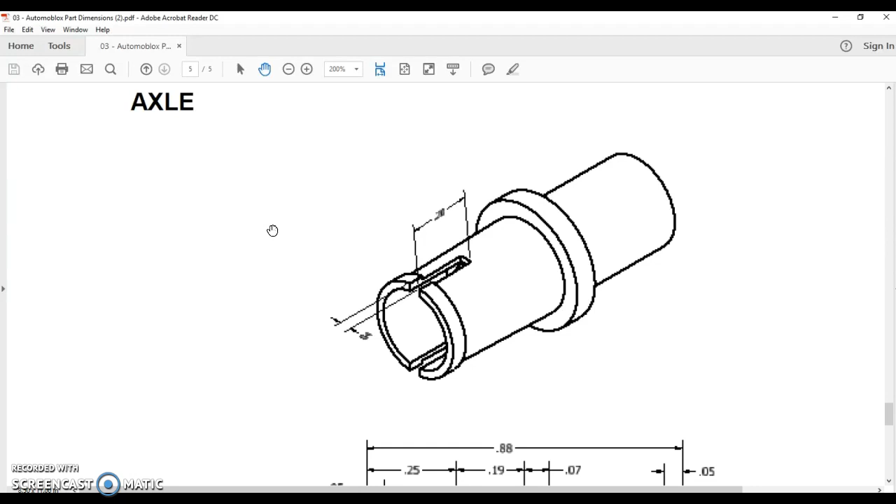Hi everybody, in this video I'm going to be walking you through the process of creating this axle for the Automoblox T9 vehicle. It looks daunting because of the number of dimensions on it, but it's really not that bad, to be perfectly honest.

We are going to draw a center line here to start off. You can see this long, short dashed line - that's our center line. Just like we used the Revolve feature for the rubber sleeve, we're only going to draw the top half of this profile, and then we should be able to revolve it to create the axle shape. If we take it easy and go a few steps at a time, it's a little bit long of a process because of the number of dimensions and constraints you have to add in, but again, it's really not that complicated, not as bad as it looks.

Okay, so let's start off with this. You see how we have the 0.88 going all the way across - that's fully the left side to the right side. What I'm going to do is start off by drawing this center line that's 0.88 long, and I'm going to lock that thing in place. That gives me a nice, good, clean anchor that I can lock to at any point for the rest of the shape.

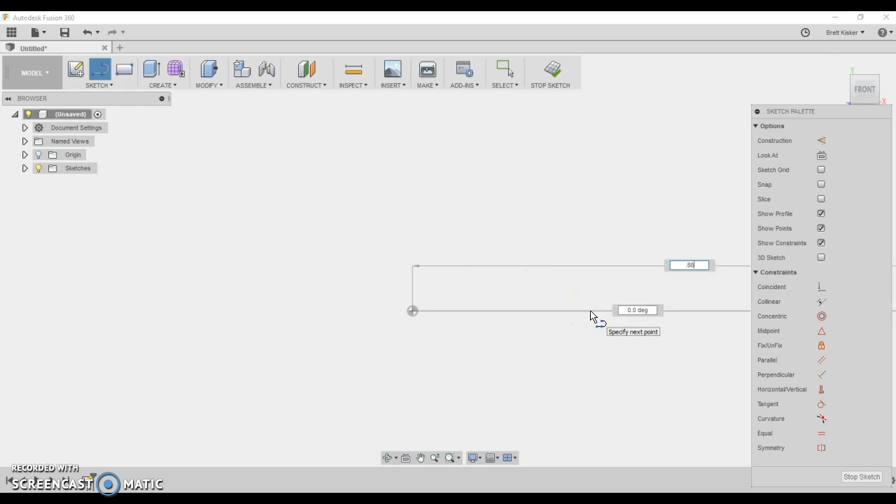So I'm going to come over here, create a new sketch. I'm going to draw on this plane, hit L for line, and place a horizontal line that's 0.88 long. I'll hit enter, and I have that created. Again, what that does is give me a line to reference.

Now, this is not actually part of my shape, so I'm going to click on it and hit X. Okay, and now it's a construction line. I don't have to worry about that being part of my profile later on.

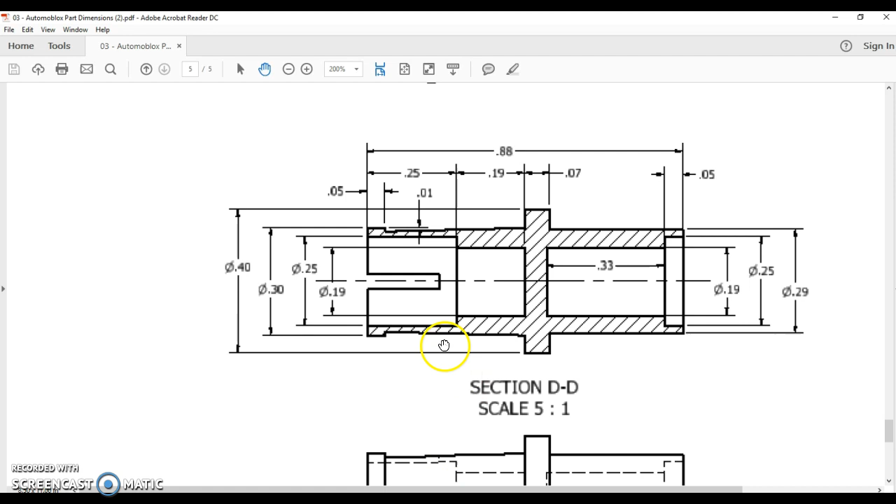Okay, now let's move forward with this. The next thing I would do is come over here and draw a rough outline of the top. So I'll come down, over, down, all the way around this profile just on the top. I'm going to make sure it lines up on the left side with the left end of that construction line, and on the right side with the right end of that construction line. I'm going to pause the video for just a second, and then unpause it once I get the rough outline and shape, and show you a few tips and tricks before we move forward any farther.

All right, so here we go. You can tell I've got my shape here, and it's not even close. I exaggerated some of this stuff on purpose because I want to show you some tips for making this a little bit easier on yourself. Okay, so first of all, a commonly made mistake - this line does not actually line up with this one. They are not collinear. A lot of students will draw it that way. Those are not the same thickness, the top and bottom portion of this, so be careful about that.

If you did go through and do that, and you move one and the other moves with it, you need to go through and delete the little constraint symbol next to it that says collinear - it'll look like this. However, on the left side, we do want to make sure that this line... we need to undo that. Okay, let's try this again. Collinear constraint - this line and its counterpart above it, those should be collinear. You can see that little symbol appears now, and when one moves, the other moves.

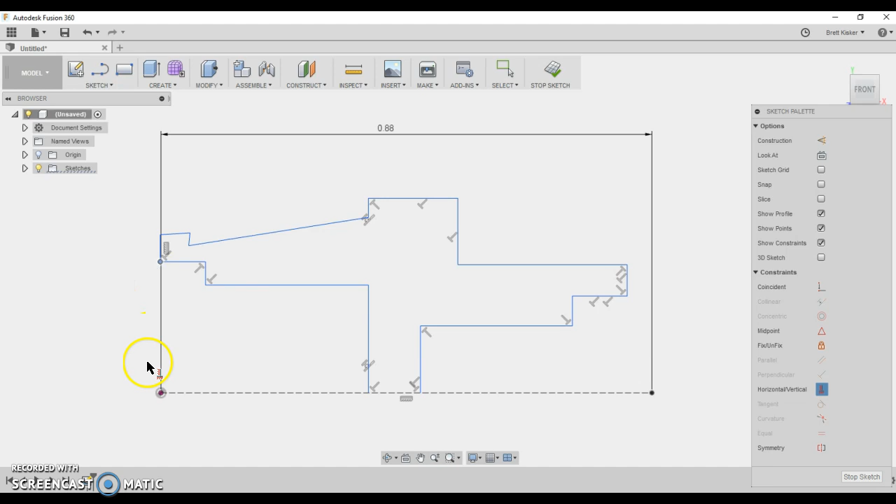Okay, that's very important. I also need to make sure I'm going to come over here and make sure I'm not clicked on a line first. I'm going to click horizontal vertical constraint, and make sure that this point lines up with the left edge, and this lines up with the right edge of the construction line, so that my actual profile is the correct width all the way across.

Now, before I get rid of that horizontal vertical constraint, I want to make sure that this little section here is actually horizontal. I notice a lot of times people will not actually draw it that way - you've got to be careful. Same thing goes for this one, this should be a vertical line, so I'm going to go ahead and click on that.

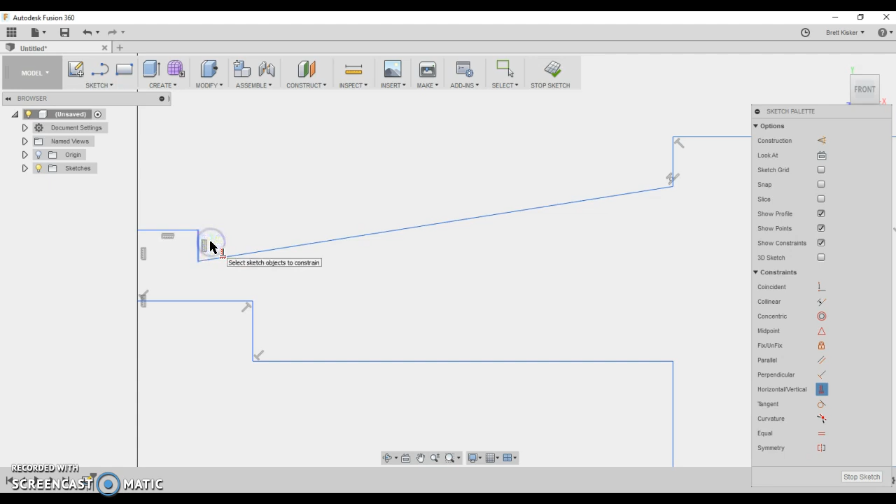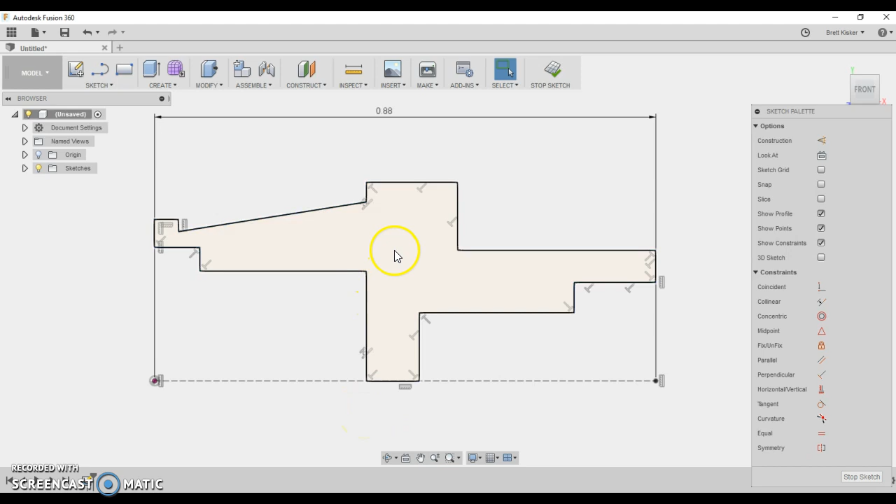Okay, so we're getting pretty close. Now it's time to go through and add dimensions. By the way, along the bottom here, there is actually a line - in fact, let me redraw it just in case. There should be a line. Aha, you see how that just filled in? If that's not filled in, you won't be able to revolve it, so make sure you draw the line that goes all the way across from here to here. Okay, so apparently I'd missed that, and you'll notice that if this is filled in with the pink shape, the profile is actually closed.

Now let's talk about the dimensions we have for this. Do not get overwhelmed by the number of dimensions here. Start off with just the widths: 0.05, 0.25, 0.19, and so on. You shouldn't have to add the 0.88 again, you shouldn't have to do any math. You should only add the dimensions that are here. So I'm going to do 0.05, 25, 19, 07, 33, 05.

I'm going to pause the video, and when I get done with that, I will unpause it and we can move forward. You do the same. Okay, so we have all of these left to right dimensions, these width dimensions, all the way across. So let's go to the next step.

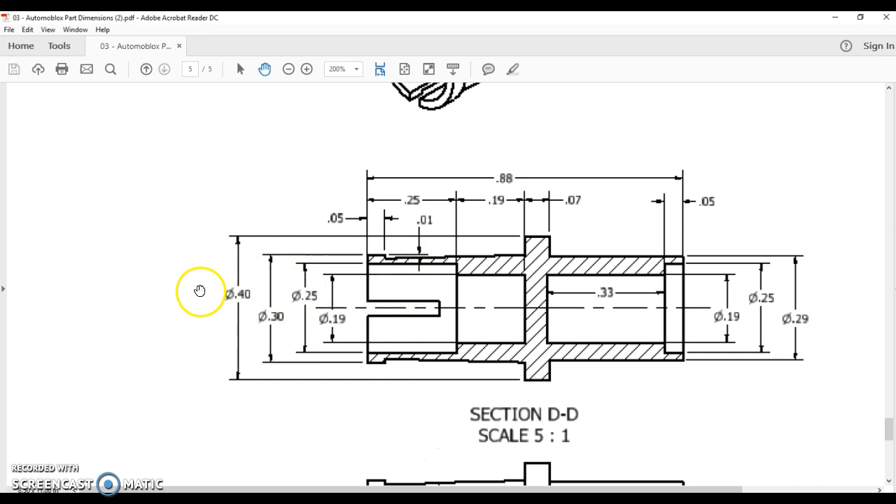Let's go through and actually use the heights, but we're going to use all these diameters, because it's a circular opening in the middle, it's actually a hole. It's a circle. Notice that they've used diameter: 0.19, 25, 30, 40. Now, a lot of students will try to convert this into a radius, or just type it in as such.

You got to be careful here. We need to know this, notice the 0.19 goes from this height all the way down to this height. So just like we did with the rubber sleeve, we're going to dimension it as a diameter of 0.19.

The way we do that is to come over here, dimension, I'm going to click between here and the center line. But instead of coming over here and typing in 0.19, I'm going to right click and say that's going to be a diameter dimension instead. Now notice it puts it up here, but it's still going to be the same, 0.19.

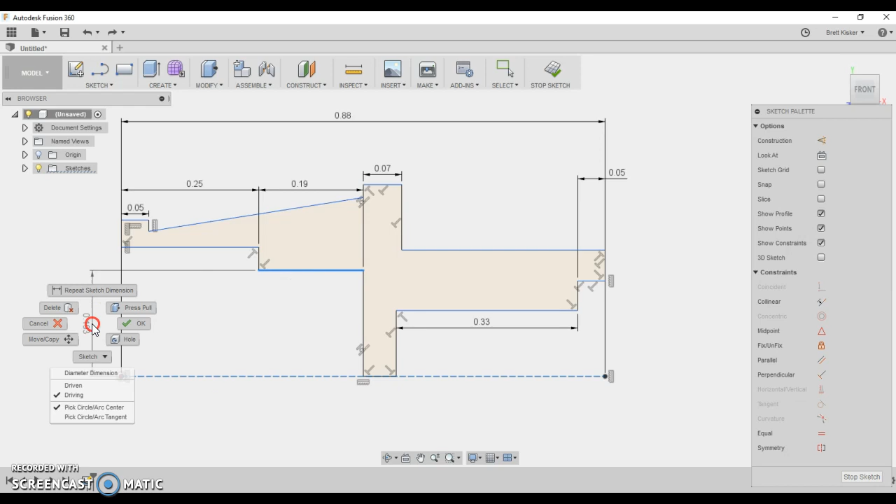And whenever I do that, that's weird, so let's go backwards here. I'm going to undo that for just a second. If I come over here and click on the center line first, now it'll go. So the line that you click first is what you're going to revolve around. You need to click on the construction line first. So that's my bad, it's 0.19.

I'll just drag it out of the way because that's messy. Okay, and I have that one dimensioned. So I'm going to come over here and pause the video, but I'm going to add in the 0.25, 30, 40. I'm also going to add in the 24, 25, and 29 on the right side. So get those in, and when you're ready, unpause the video.

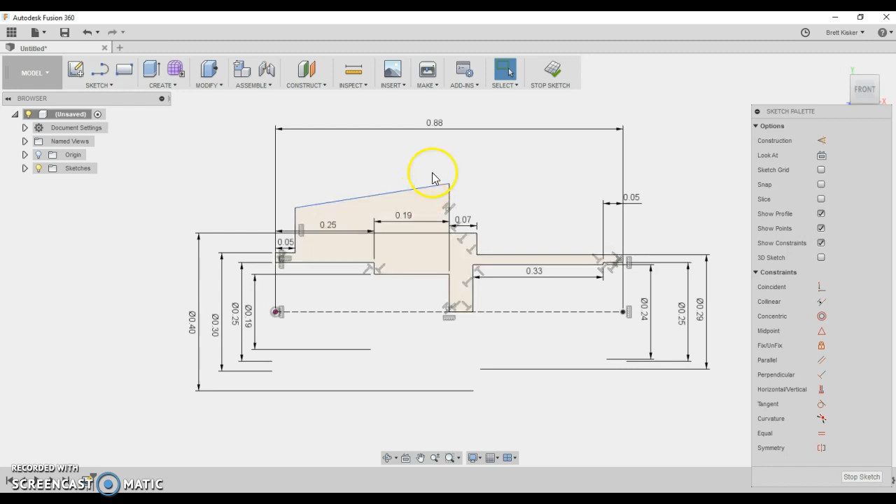Okay, so I've added all of these diameters in, and it looks good, except I got this weird thing happening over here. You'll notice that the lines are starting to fill in black, which is good, because that means they're constrained. The one that's blue, of course, is the one that can still float around, which is this guy. Don't get concerned about that.

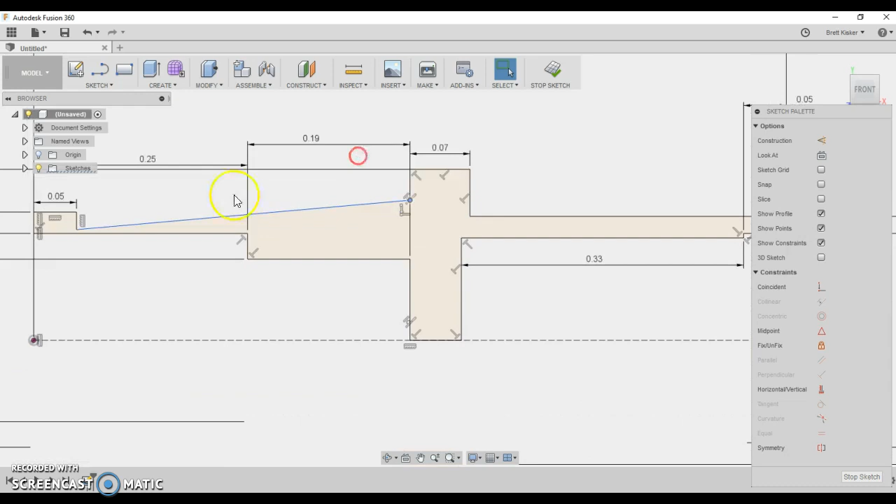All we need to do is drag this back down into place, and we're getting pretty close to where we need to be. You'll notice I'm able to actually move that, I'm able to move this up. The question then, and the one that's always missed, is how do I get this thing into place? So what we have to do is look really carefully at this.

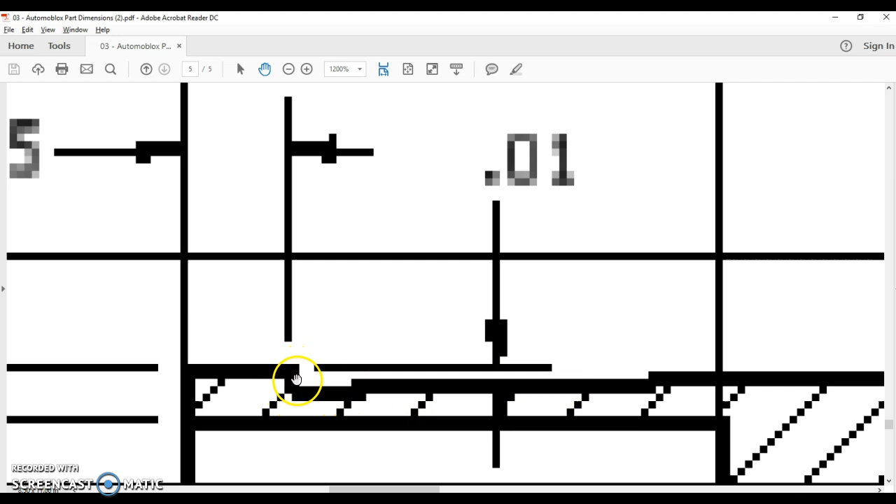You see this 0.01? Let's zoom in on that for a second. See what that's saying, let's see if I can get this back. What that's saying is it's 0.01 inches between the top surface here, that's where that extension line is, and then this arrow, which is kind of hidden by the shape, goes to the bottom line. So that means if we were going to go from this point to this point, that's a drop of 0.01.

So let's go add that in. Dimension, I'm going to zoom in here. This drop is 0.01. Okay, so now I have the bottom placed correctly. The question now is, where's the top?

What is this? And what it doesn't really say, and it's tough to see, is that if I was to zoom back out, this point actually has an extension line that goes all the way to it. This is actually lined up horizontally with this line.

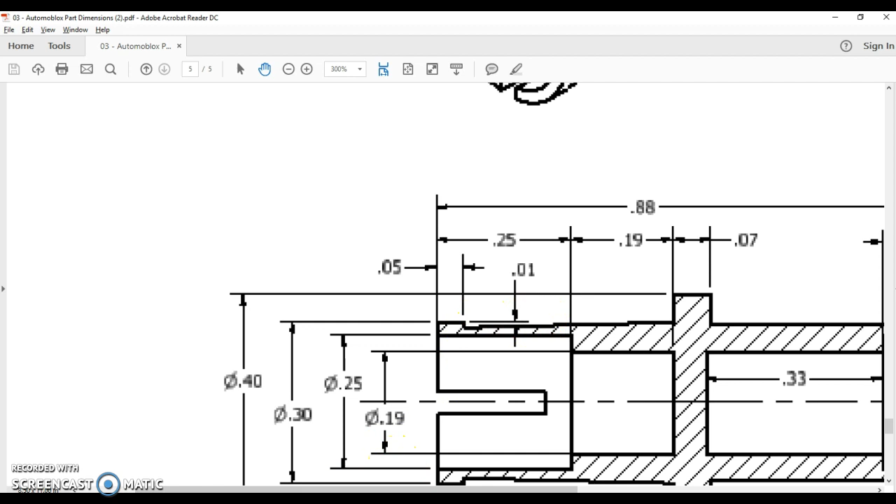So what I can do is come back over here, click on the horizontal vertical constraint, and say that this dot needs to line up with, zoom in a little bit so you can see it, this one right here. Now it's black, closed profile. The entire shape is black, this thing is fully constrained.

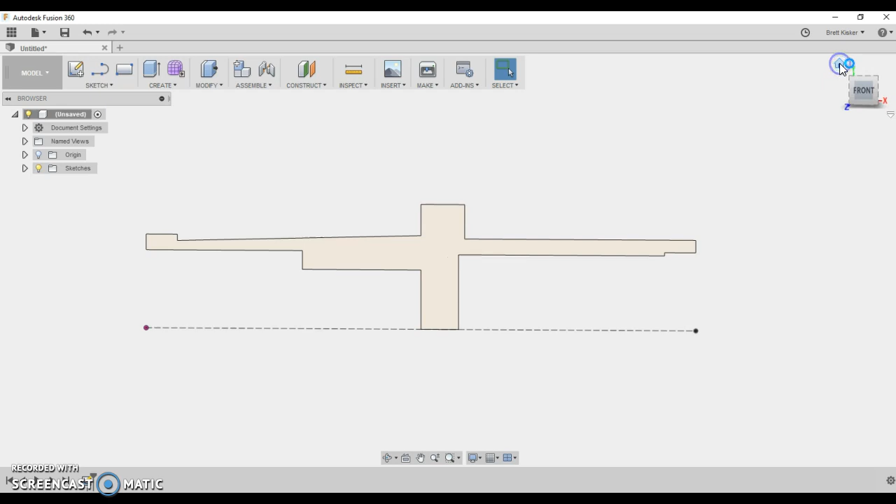I can stop the sketch. I can revolve. I can choose the center line as the axis, and I want to go all the way around 360 degrees. So that's a good starting point for the axle.

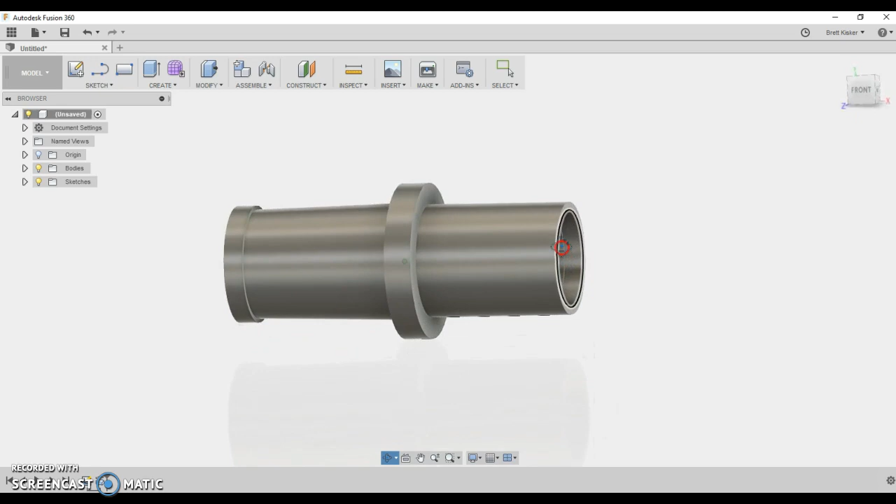Hopefully that makes sense. I will create a second video here in just a second on how to do that rectangular cutout over here on the left-hand side. If you have any questions, feel free to let me know.